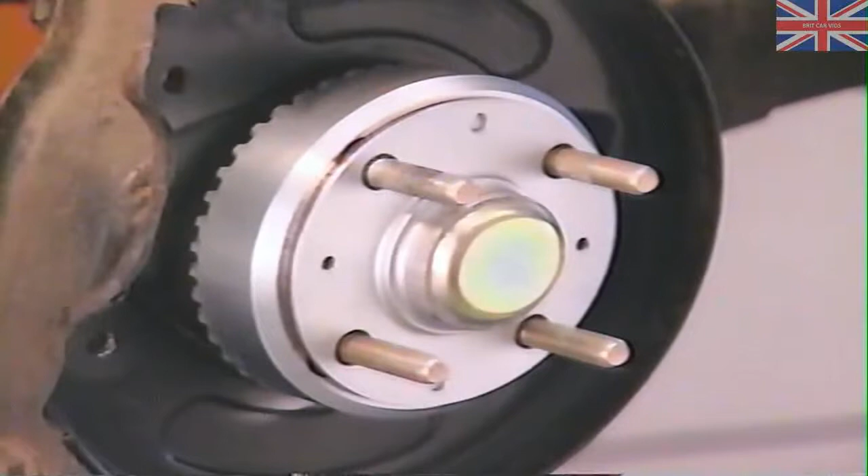As with the other MMC anti-lock systems that you've seen, this system has a wheel speed sensor at each wheel. The wheel speed sensors work along with a toothed tone wheel to send electrical pulses to the ABS controller. These signals tell the controller how fast the wheels are turning.

On the Colt and Summit, the ABS controller is located under the instrument panel behind the floor console. The ABS power relay, which supplies power to the ABS controller, is located behind the lower instrument panel to the left of the steering column.

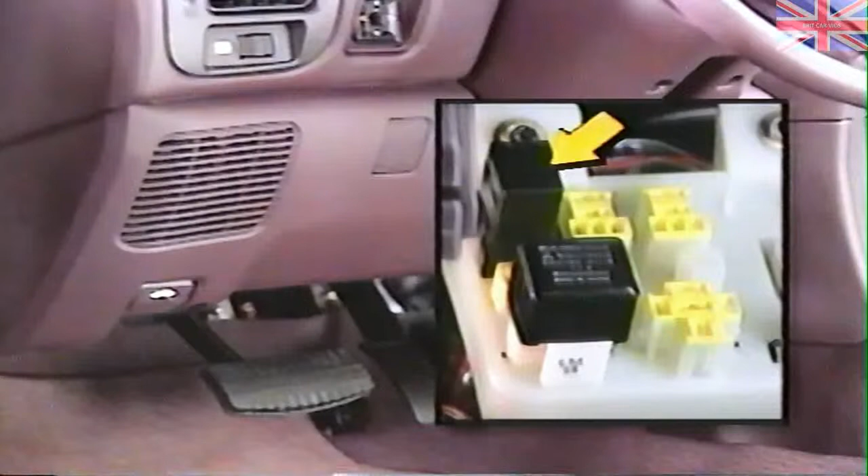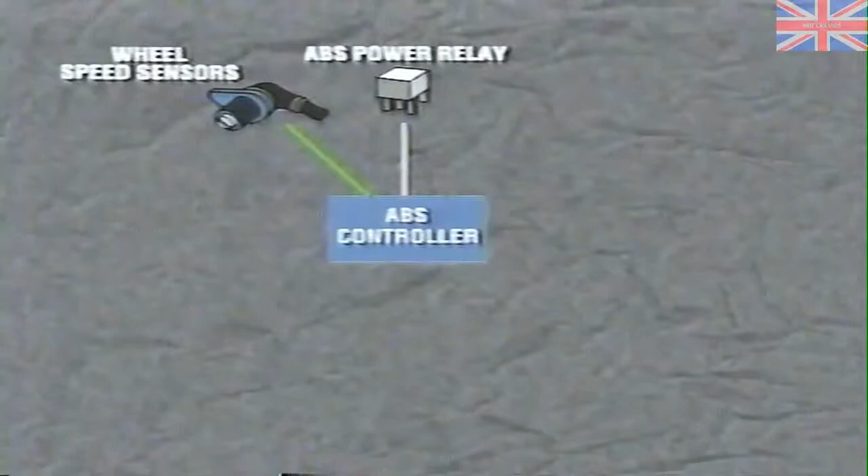Besides the input from the wheel speed sensors, the other informational inputs to the controller come from the stoplight switch and the generator L terminal. The stoplight switch above the brake pedal informs the controller when the brakes are applied. The generator L terminal signal comes from the generator. It lets the controller know when the engine is running.

The outputs from the controller are to the ABS warning light, the data link connector, the ABS valve relay, the solenoid valves in the hydraulic unit, and the ABS motor relay.

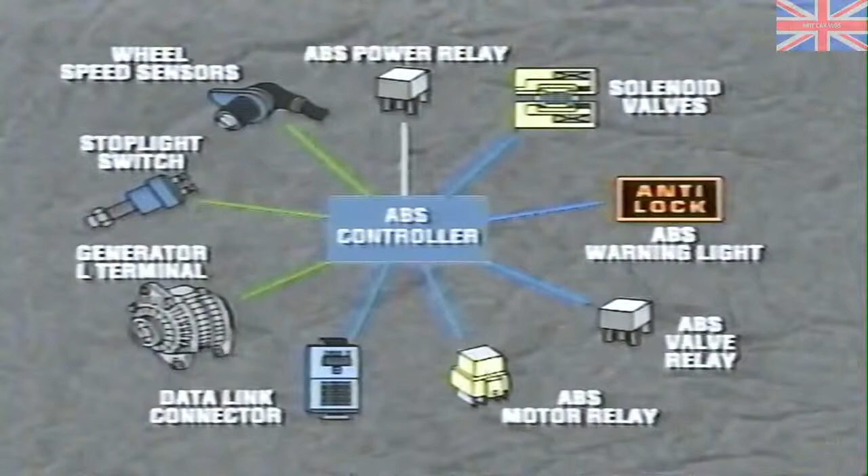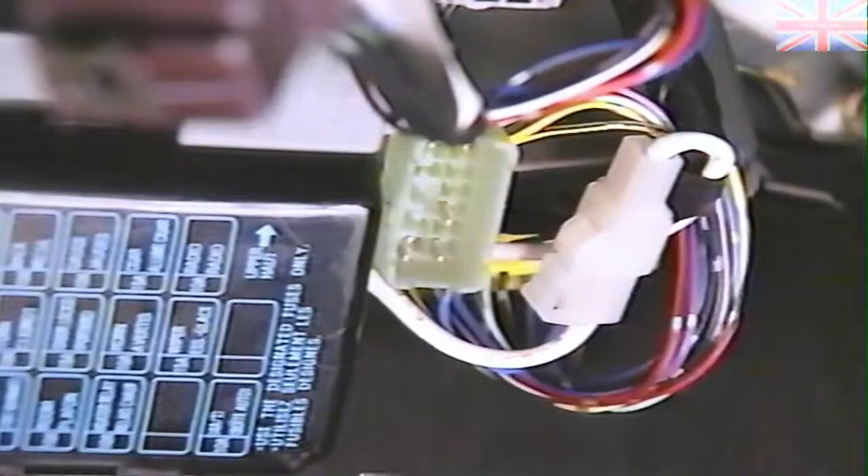As you no doubt know, the ABS warning light in the instrument cluster will be triggered by the controller if a problem develops with the anti-lock system. Of course, all diagnostic information contained in the ABS controller can be accessed through the data link connector.

The ABS valve relay, which supplies power to the solenoid valves, is located in the engine compartment near the hydraulic unit. The hydraulic unit is mounted on the left inner fender in the engine compartment. It contains a solenoid valve for each ABS channel. On the '93 Colt Summit, that means there are 4 valves.

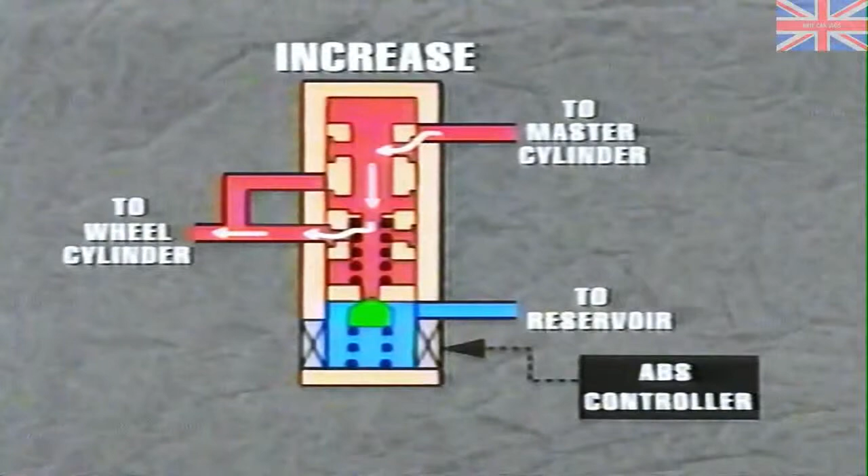The controller can signal a wheel's corresponding valve to either increase pressure or reduce pressure, based on how much brake hydraulic pressure is needed for each wheel to keep it from locking up. During the anti-lock braking process, more hydraulic pressure is required than can be supplied by the power brake booster.

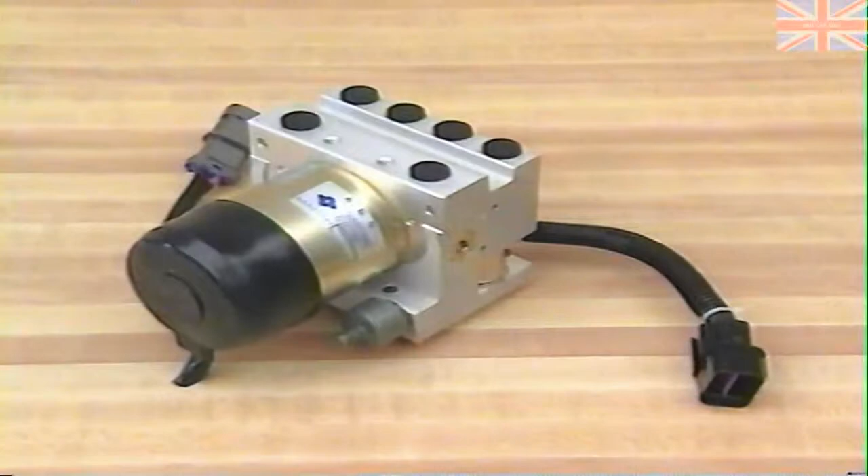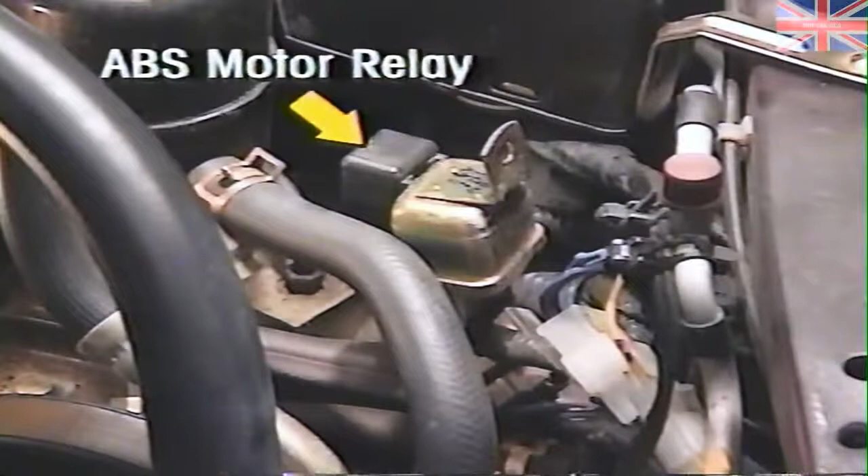To supply the necessary hydraulic pressure for the system, an electrically driven pump is used. The pump and the motor that drives it are both contained in the hydraulic unit. The pump motor assembly is activated by the controller through the ABS motor relay. This relay, like the ABS valve relay, is located near the hydraulic unit.

If there is an ABS failure, the ABS controller will interrupt power to the valve relay so that no power is going to the solenoid valves. This is called the fail-safe mode. In the fail-safe mode, ABS will not operate, but full foundation braking is available.

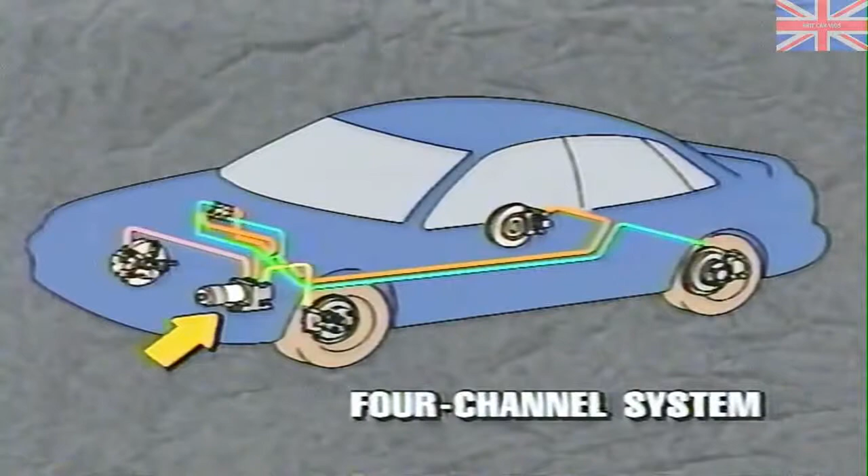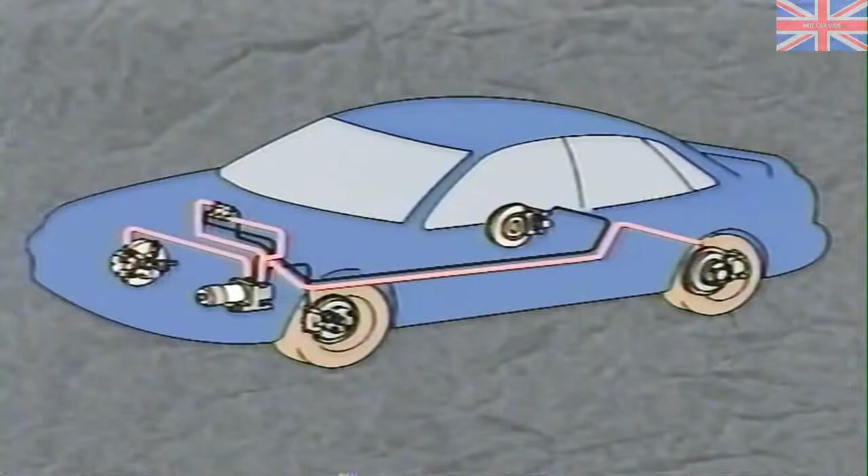Of the Colt Summit system's 4 channels, the front 2 wheels are completely independent circuits, but both rear wheel circuits are balanced by a select low valve in the hydraulic unit. This valve mechanically equalizes the brake pressure between the rear wheels so that during anti-lock operation, the lower of the pressures applied to the rear wheels is always selected for both wheels. This increases vehicle stability. The valve accomplishes this without fluid from the 2 circuits coming in contact with each other. This maintains the integrity of the dual diagonal brake circuits of the foundation brakes.

How does all this come together when it's needed? Let's look at an example. Say you're driving on your way home and another vehicle unexpectedly cuts in front of you. You brake quickly, activating the ABS. Unfortunately, your right rear wheel crosses through a small puddle of water. How does the Colt Summit system react?

Since the front wheels do most of the braking on any car, as you might expect from such intense braking, both wheels are displaying a locking tendency. The ABS controller determines this from the slowing wheel speed sensor signals. The controller then signals the valves for the front wheels to reduce pressure. As soon as the locking tendency is over, pressure is reapplied.

Naturally, since both front circuits are independent, these actions will not happen at exactly the same moment. In the meantime, the right rear wheel has little traction in the puddle. The controller notices the wheel speed signals slowing down to the point of locking, so it tells the appropriate valve to release brake pressure. At the same time, the left rear wheel is on dry pavement and displays no locking tendency, so its pressure should increase, but it won't.

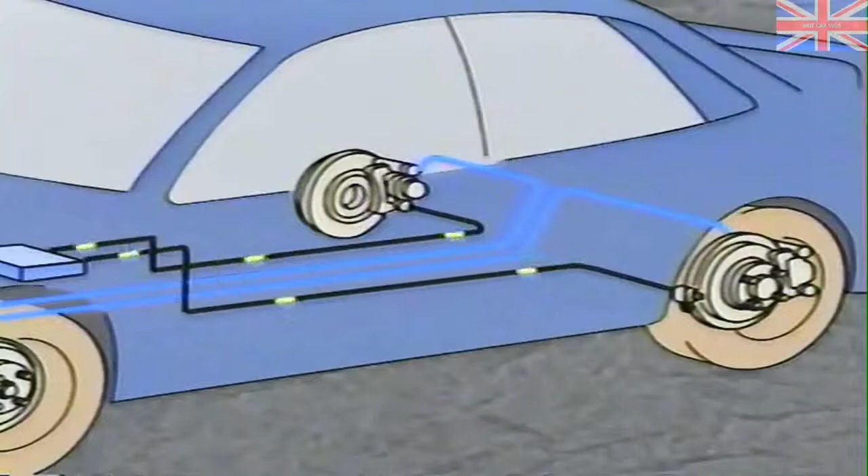Why? If you remember back to the system component descriptions, the select low valve equalizes the pressure to the lesser of the two pressures sent to the rear wheels. In this case, the pressure of the right rear wheel is the lesser pressure because it's on wet pavement. During all of this action, the pump motor assembly is pumping the brake fluid to maintain the hydraulic pressure of the system.

Of course, this is an oversimplification of the entire process. All this and much more happens in fractions of a second. And yet, despite the short distance, our car was able to stop in time. If the distance was shorter, then the anti-lock system would still have enabled the driver to brake and effectively steer around the obstruction. That's a basic overview of the '93 Colt Summit anti-lock brake system, and it's a good place to start because the other MMC anti-lock brake systems are similar to it.

Now, let's test your memory with a review question.

The anti-lock system on the '93 Colt and Summit has how many hydraulic brake channels? The answer is the system has 4 separate hydraulic channels.

The remaining MMC anti-lock brake systems are not only similar to the '93 Colt Summit system, but some are nearly identical to each other. For instance, the anti-lock brake system used on the front-wheel drive Laser Talon, Colt Vista, Summit Wagon, and Stealth models are in reality one system. This system, unlike the '93 Colt Summit 4-channel system, has 3 channels. The rear wheels on this system are controlled by the same solenoid valve in the hydraulic unit.

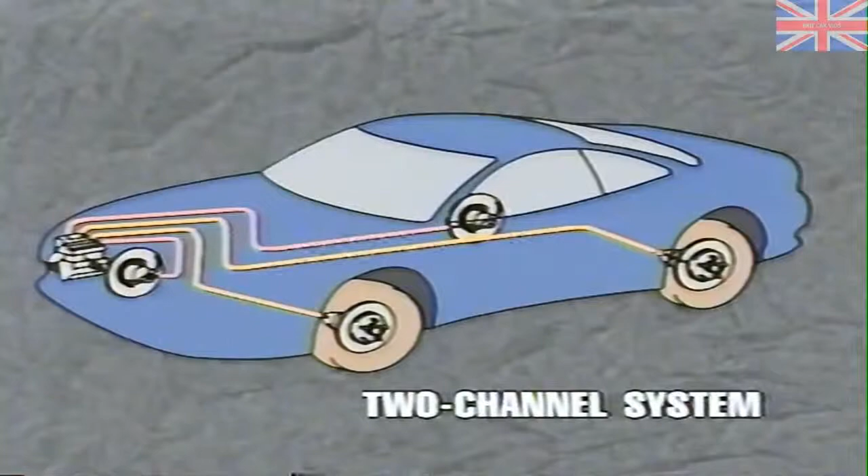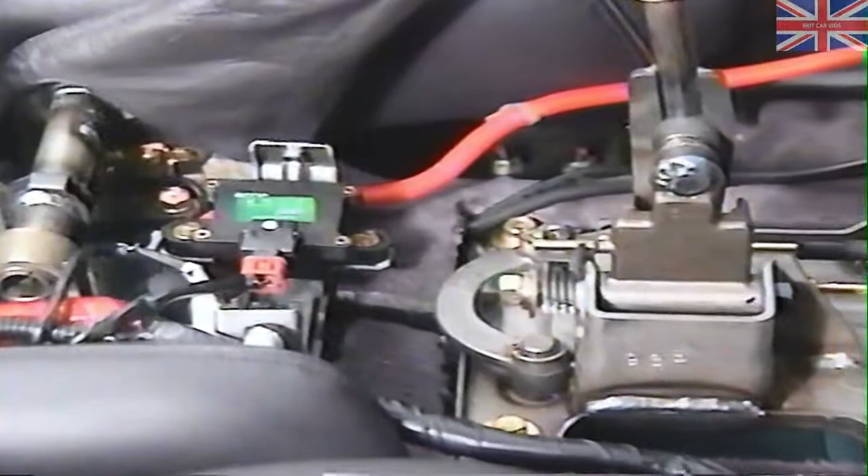Another unique feature of this all-wheel drive system is its use of a G sensor. Since ABS won't activate with the vehicle standing still, the G sensor lets the controller know that the vehicle is still moving, so it can apply the brakes accordingly. The G-sensor is needed on all-wheel drive models since all four wheels are connected by a drive line. And on ice or other slippery surfaces, the wheels can decelerate at very nearly the same rate to the point where they are not turning, causing the ABS controller to think the vehicle has stopped.

Despite the differences these two systems have with the Colt Summit system, the components are quite similar. Their locations do vary from car to car, though. Review the February '92 Mastertech or the December '91 Videotech releases for specific ABS component locations on all but the '93 Colt Summit models. You can see that despite some differences in these systems, the basic operation is very similar.

After this review question, we'll take a look at how this ABS operation can be misunderstood by customers.

The anti-lock brake system on MMC all-wheel drive models has how many hydraulic channels? The answer is 2 channels. Every MMC all-wheel drive model with ABS has a 2-channel system.

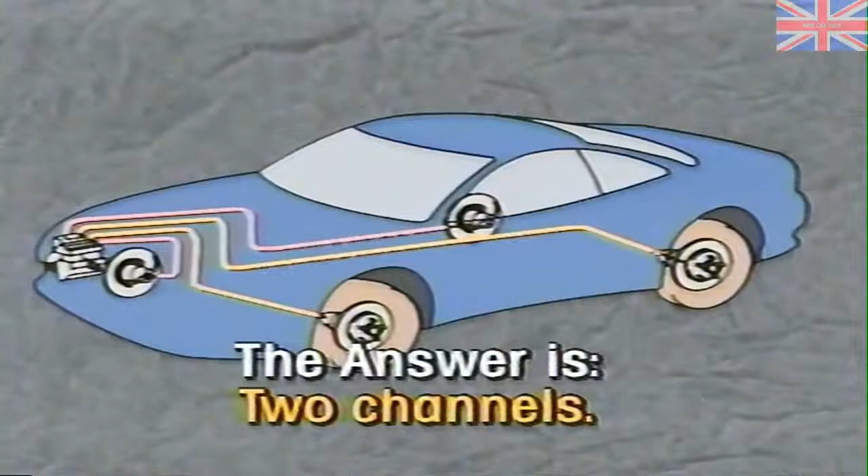With the quick growth in vehicles equipped with anti-lock brakes, many customers will be driving ABS-equipped cars for their first time. While you may know much about how anti-lock systems operate, the new customer may have no idea what to expect. The fact is, many new car customers don't thoroughly read their owner's manual, so it should come as no surprise that they come to the service department complaining of strange vibrations and noises.

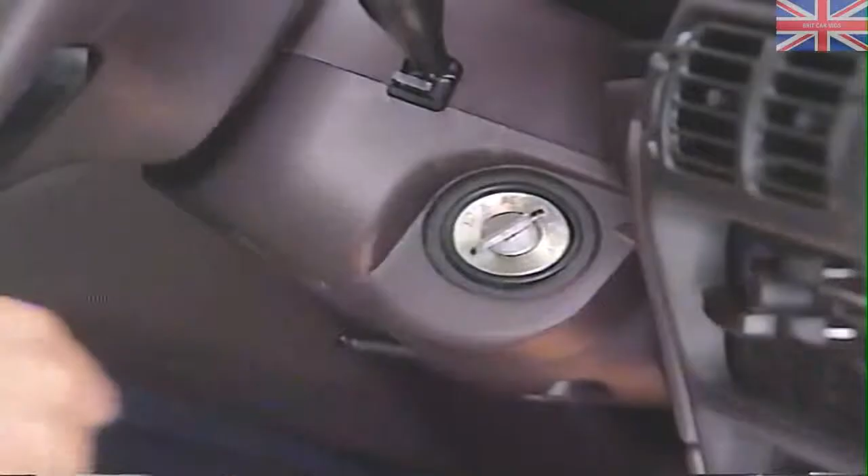In such cases, the patience of technicians and service advisors can go a long way to putting customers' minds at ease. Let's review some of the operating characteristics of the MMC anti-lock braking systems. First, the ABS warning light will stay on for about a second after starting the vehicle. If the light stays on after this, then there is a problem with the system, and ABS is not available.

In such a case, stress to your customers that at this point, the car is as safe as any non-ABS vehicle, since full foundation brakes are still available. However, if the foundation brake light comes on, advise them not to drive the vehicle. If the ABS warning light comes on while driving, inform the customer to pull over and turn off the engine as soon as it is convenient to do so.

They should then restart the car and drive at speeds of 6 miles per hour or higher for at least 20 seconds. If the light goes out, the system is fine. Driving at this speed allows the ABS to go through its self-check procedure that occurs after startup. If the ABS warning light stays on, the customer should be advised to bring the car in for service.

The one operating characteristic of the anti-lock system that causes the most concern among owners not used to ABS-equipped cars is the self-check procedure we just referred to. On MMC anti-lock systems, the check is actually performed at about 4 miles per hour. The ABS controller operates the components of the system to check if they are working properly. A whining noise and vibration may be noticed when the pump motor and solenoid valves are activated. Assure customers that this is entirely normal.

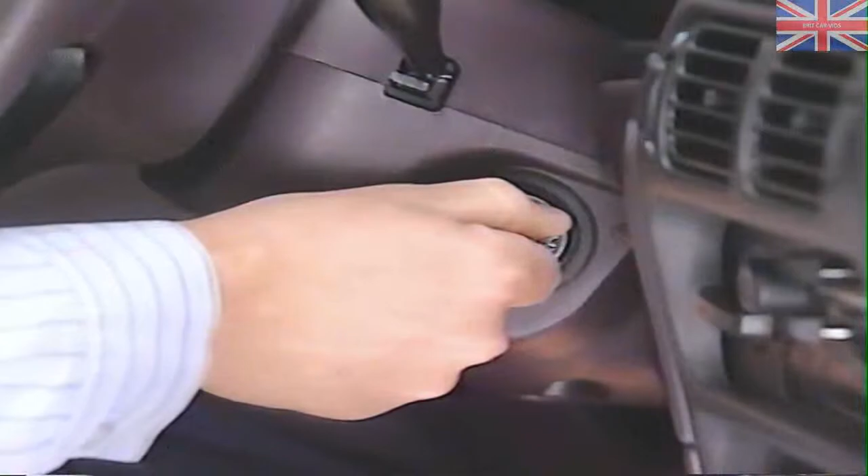Once the car is started, the ABS warning light will come on as long as the fusible link is disconnected. The fusible link can be reinstalled once the battery has sufficiently charged. With the fusible link installed, start the car again to check that the ABS warning light goes out. This procedure is similar for all ABS-equipped MMC vehicles, the only difference being which component is disconnected. The February '92 Mastertech and the December '91 Videotech discuss the procedure for all MMC models except the Colt Summit we just covered.

If customers noticed the vibration and noise during the ABS self-check, then they may very well notice it during an ABS stop. Some vibration will be felt in the car body, steering wheel, and brake pedal. In addition, the pedal will drop somewhat and then feel hard, as an increasing amount of brake fluid is drawn from the reservoir. Some customers may be unaware of when ABS is supposed to operate. They may mistake ABS operation for a problem in the brake system.

For instance, during normal braking on a rough road, the driver may notice the pedal drop and then turn hard. The vehicle also comes to a stop much quicker than the driver anticipated. Since this isn't a panic stop, the customer is unaware that the ABS was activated. In such cases, remind the customer that this just shows the ABS is working properly.

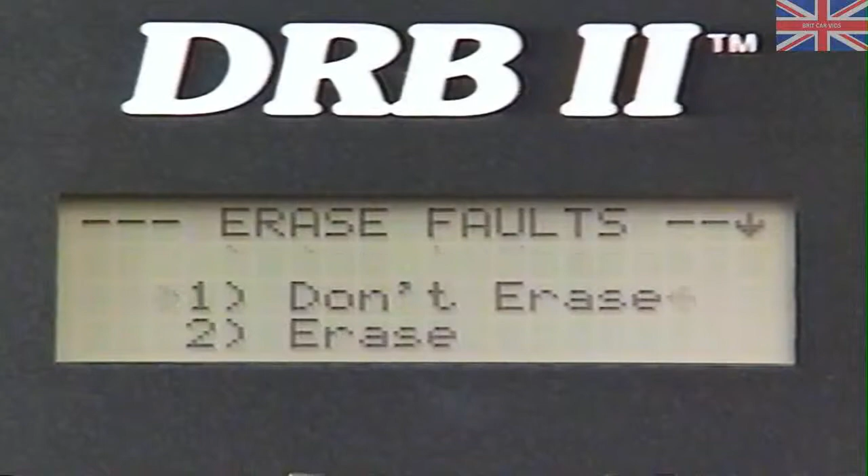Another important item to remember is to clear all trouble codes from the controller's memory. If this is not done, the ABS warning light will stay on, giving the impression of a failed ABS controller. Always check that the codes are cleared before you assume the controller is faulty. If the codes can be erased, it means the problem was temporary, perhaps intermittent, or happens only when driving.

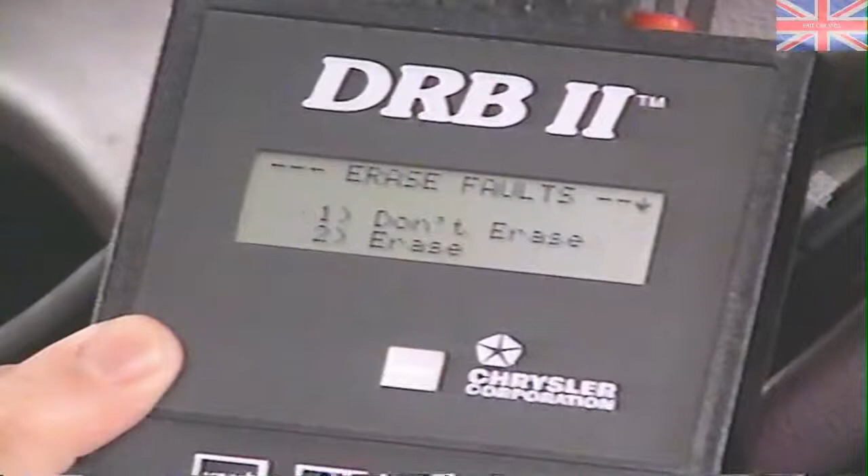If it is not possible to clear the trouble code from the controller's memory, then that means the trouble is currently being detected by the controller. For instance, trouble codes cannot be cleared when the ABS is in the fail-safe mode. Remember that this is when the system is not operating properly and is then shut down by the controller. If you cannot clear the codes, the trouble will have to be repaired following the steps in the anti-lock braking system troubleshooting section of the service manual.

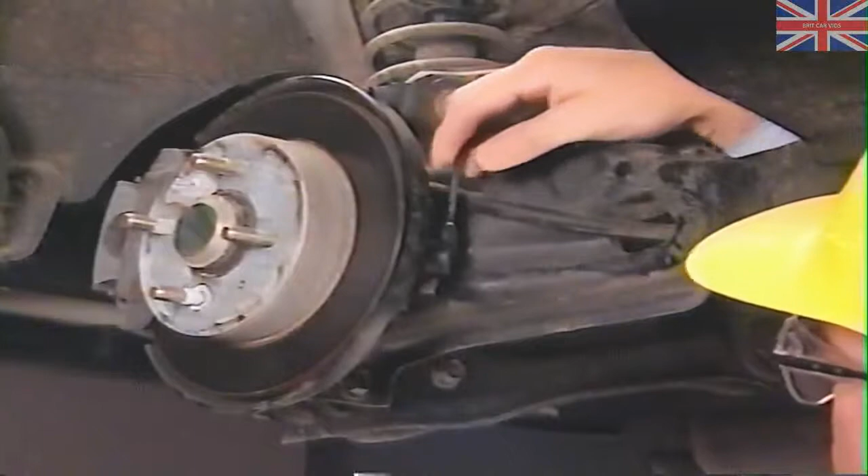If you can clear the code and you believe the problem to be intermittent, try to duplicate the cause. Usually, intermittent problems are caused by vibration, heat, or excess electrical resistance. Wheel speed sensors are especially vulnerable to vibration from the movement of suspension components. To duplicate a vibration, gently shake or rock the suspect component and see if a trouble code is registered. To test for a malfunction due to heat, use a hairdryer to heat the component. Be careful not to heat the part above 176 degrees or it could be damaged.

If electrical interference is suspected, turn on all electrical switches and see if the problem reoccurs. Additionally, check that electromagnetic or radio frequency interference from cellular phones or two-way radios is not interfering with the ABS. The customer should also be questioned if the interference happens in one location. This could be caused by such things as TV stations or radar from airports. Of course, intermittent problems can be caused by a bad connection. Inspect electrical connectors and terminals to ensure that the terminals are clean and their connections are complete.

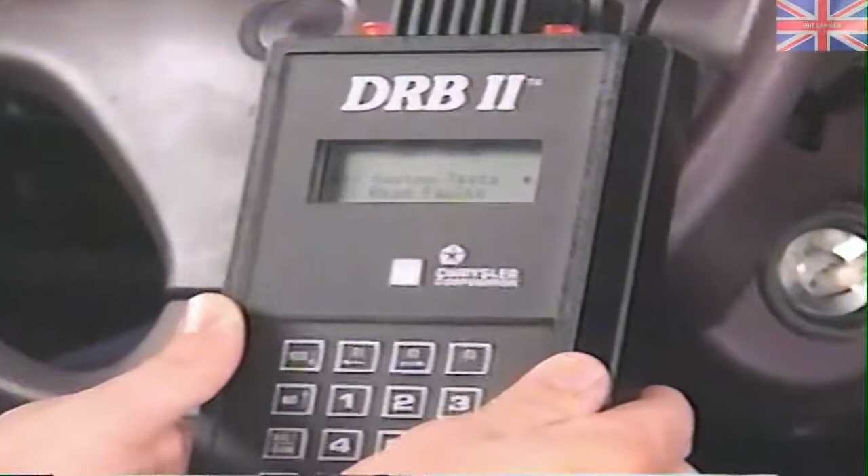Another important diagnostic point deals with the scan tool. If you have used the scan tool on these MMC vehicles, then you will have noticed that the time before readouts appear on the screen can be longer than with the domestic systems. This is normal and does not indicate problems in the system. The MMC system simply has a slower baud rate, which is the unit used to measure the quickness of communication.

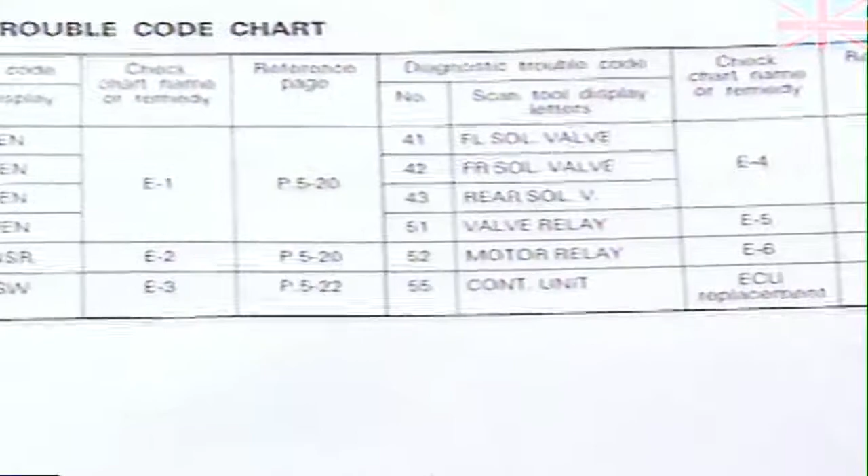As for the readouts themselves, they are identical on all Stealth, Laser, Talon, and Colt Vista, Summit wagon models. There are 12 trouble codes on these models. On the new Colt, Summit models, however, there are 27 codes, many of them with different numbers than on the other cars. Keep this in mind in case you have the codes for the other cars memorized.

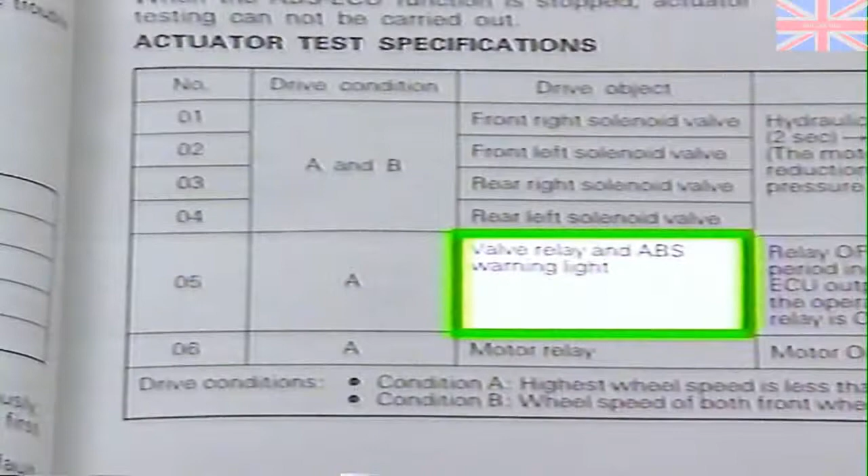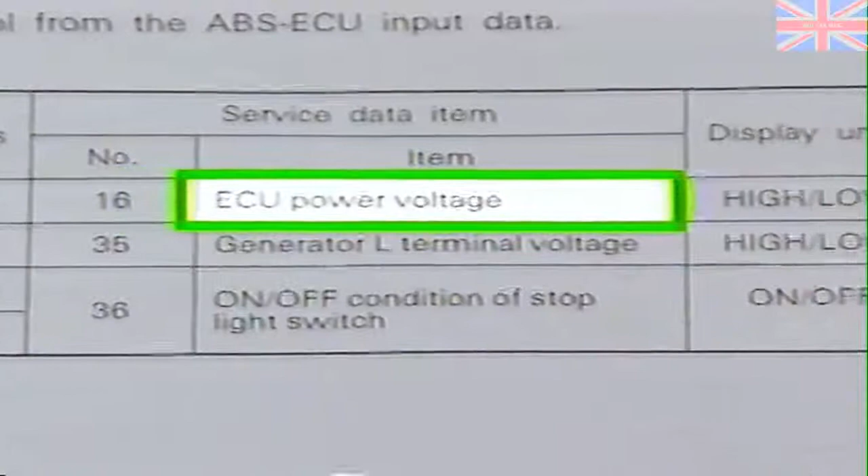There are also differences in the actuator tests that can be performed with the scan tool. In addition to the solenoid valve tests on previous models, the newer Colt, Summit system has tests for the valve relay and ABS warning light, as well as the test for the motor relay. The Colt, Summit system also allows you to check wheel speed sensor signals, ABS controller voltage, the generator L terminal voltage, and the on-off status of the stoplight switch. The systems on the other MMC vehicles do not have this ability.

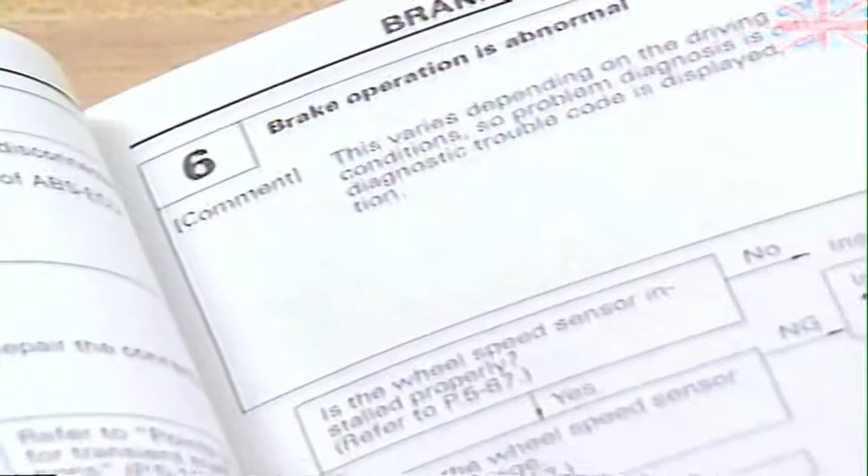Regardless of which system you have to diagnose, using the scan tool and the diagnostic flowcharts in the service manual will help you quickly find the cause of any ABS problem. After the review question, we'll use the diagnostic flowcharts to solve a sample problem.

If you disconnect the scan tool before turning off the ignition, what kind of trouble code will be triggered? The answer is a trouble code for a failed ABS controller will be triggered. Always turn off the ignition before connecting or disconnecting the scan tool.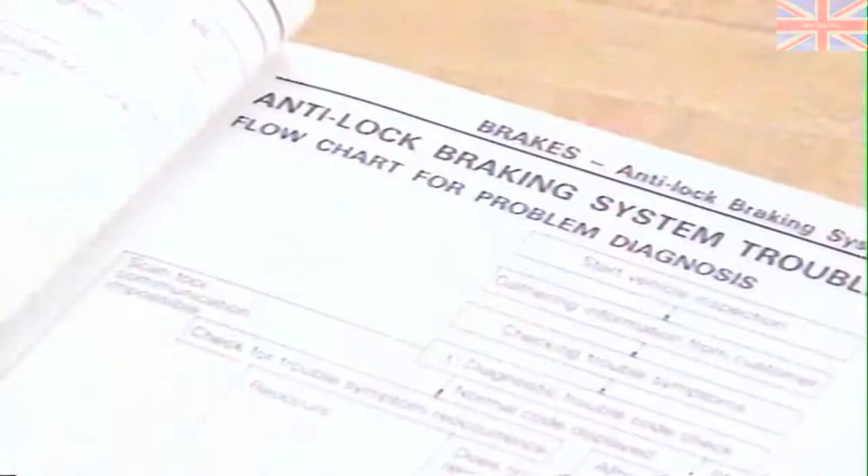A customer brings in a '93 Summit with an ABS warning light that stays on after the vehicle is started. The customer tells the service writer that the problem developed shortly after the vehicle became severely stuck on a muddy, rough road. When the job gets to the technician, he looks up the general ABS troubleshooting flowchart, since an illuminated ABS warning light could signify just about any ABS component.

The first step in the procedure is to gather information from the customer. This has already been done, so the technician moves on to the next step, which is to check trouble symptoms. The ABS warning light stays on after the car is started, just like the customer said. The next step in the flowchart is to check for trouble codes with the scan tool. Remember that the scan tool should be hooked up with the ignition off.

The technician finds the trouble code 23 for the right rear wheel speed sensor was in the controller's memory. At this point, you should write down the information so that the trouble code can be cleared. Now that the technician has a trouble code, he can refer to the more specific trouble code flowcharts.

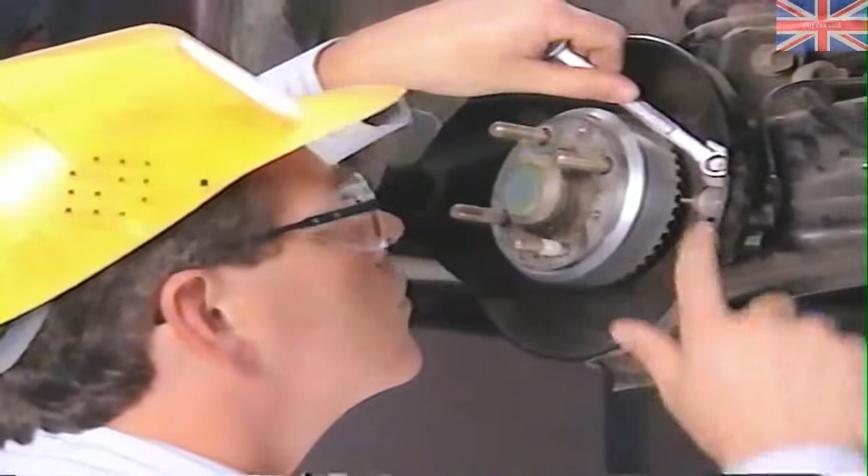The comment at the top of the flowchart says that this code is displayed when wheel speed reaches at least 6 miles per hour, but no wheel speed pulses are input, and yet the controller can't verify that the circuit is open. The first step of this chart refers the technician to the procedure for the proper installation of the wheel speed sensor. Everything looks correctly installed, but this procedure also requires checking the air gap between the sensor and the tone wheel. To check the gap, a blade-type brass feeler gauge is recommended, since it will not be affected by the magnet in the sensor's pole piece.

The service manual states that the gap should be between 12 thousandths and 35 thousandths of an inch. This gap appears to be a very small amount over 35 thousandths of an inch. Since the gap is so close to being out of range, this could account for the trouble code. Perhaps the gap got knocked out of adjustment when the car got stuck.

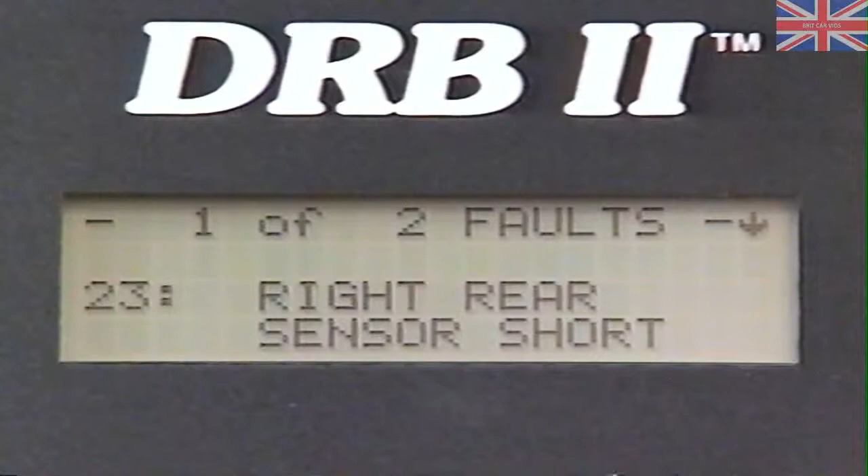The technician readjusts the air gap to well within the specifications and takes the car on a road test to see if the trouble code and the warning light reappear. Unfortunately, both do. Apparently, the air gap was not the problem. After again clearing the trouble code, the technician goes back to the flowchart.

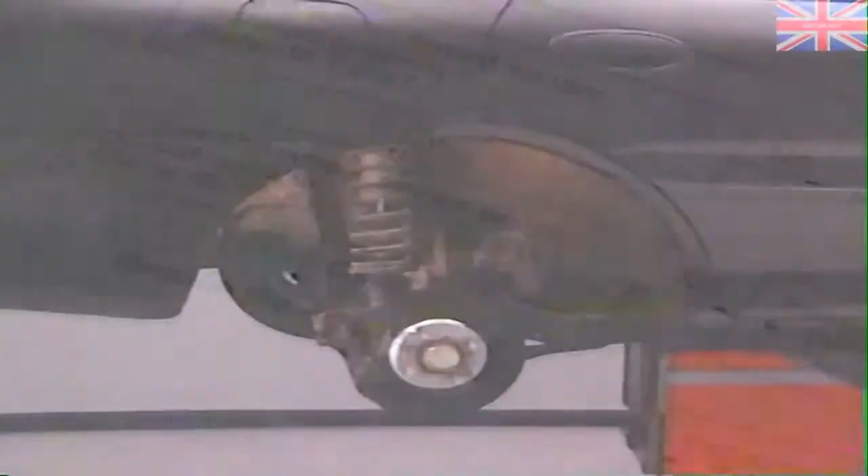The next step is to check the wheel speed sensor output voltage. This must be done with the vehicle on the hoist, the wheel off, and the parking brake released. The right rear wheel speed sensor connection to the controller has to be probed at terminals 37 and 45 by either an oscilloscope or a digital volt-ohm meter. Make sure that when you probe this or any connector, you do it from the harness side. Probing the terminals can spread the terminals out, resulting in a bad connection.

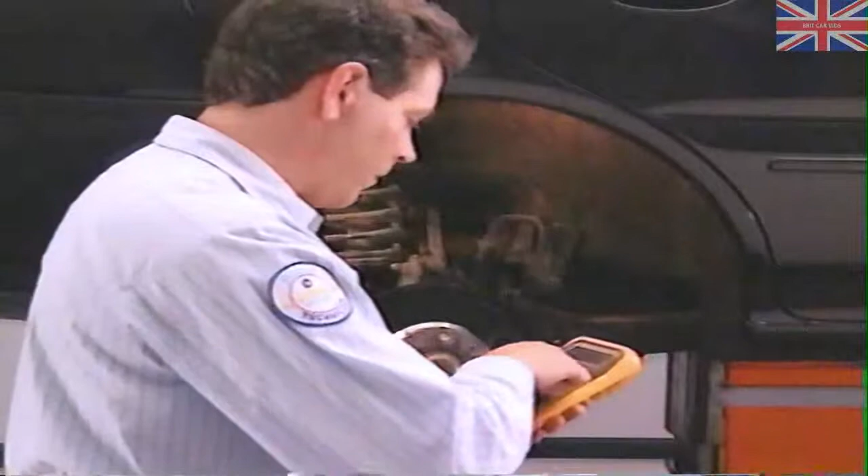With the volt-ohm meter hooked up and in view, turn the wheel at approximately 1/2 to 1 full rotation every second. Check the voltage while doing this. Here, we're supposed to get an output of at least 70 millivolts, but we're getting much less. It looks as though the sensor is faulty. To make sure, the flowchart refers us to a test for wheel speed sensor continuity.

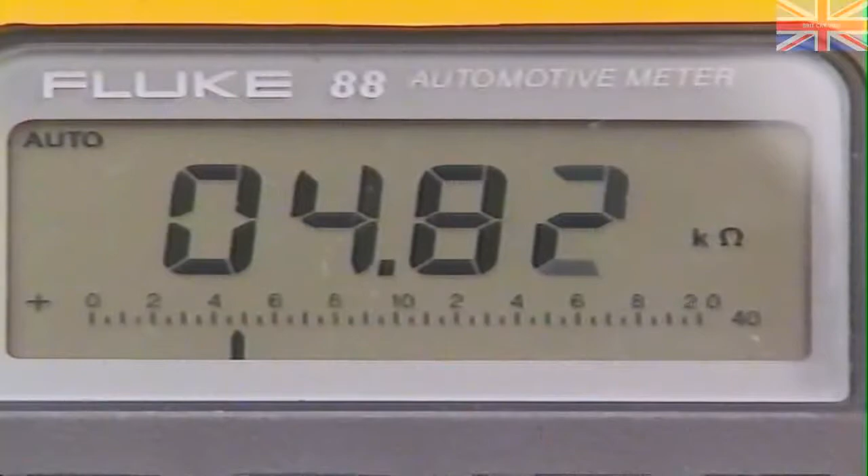After removing the sensor, the resistance is measured across the terminals. We get a resistance reading that is much higher than the 1.4 to 2.2 kiloohms listed in the service manual. It's obvious that a new wheel speed sensor is in order. Perhaps the old one got damaged when the car was severely stuck on that rough road.

After the new sensor is installed and the air gap checked, the technician takes the car for another ride. The ABS warning light is no longer on, and a check with the scan tool reveals that no trouble code has been registered. Not every diagnosis and repair goes this easily, but following the proper procedures in the manual will help you find the answer to your diagnostic problems in the minimum amount of time.

Now, let's see how much time it takes you to solve this problem. When probing an electrical connector, should the probe be inserted in the front or in the harness side?

The answer is that, when possible, you should always back probe a connector to prevent spreading out the terminals, which could lead to poor contact.

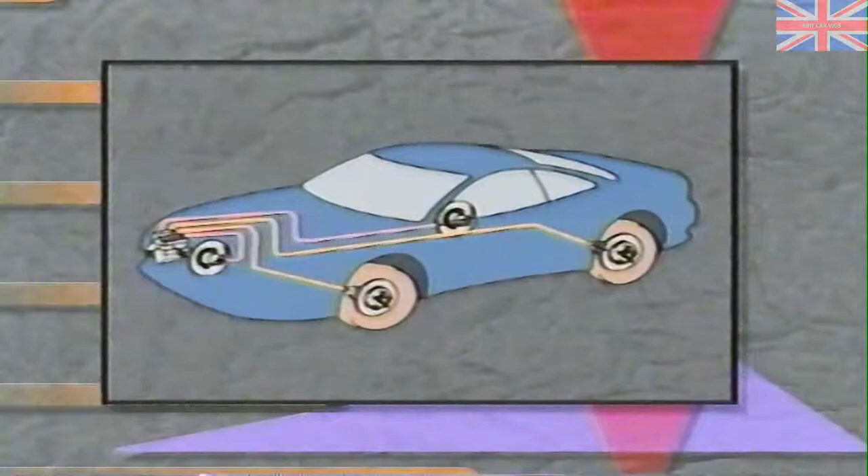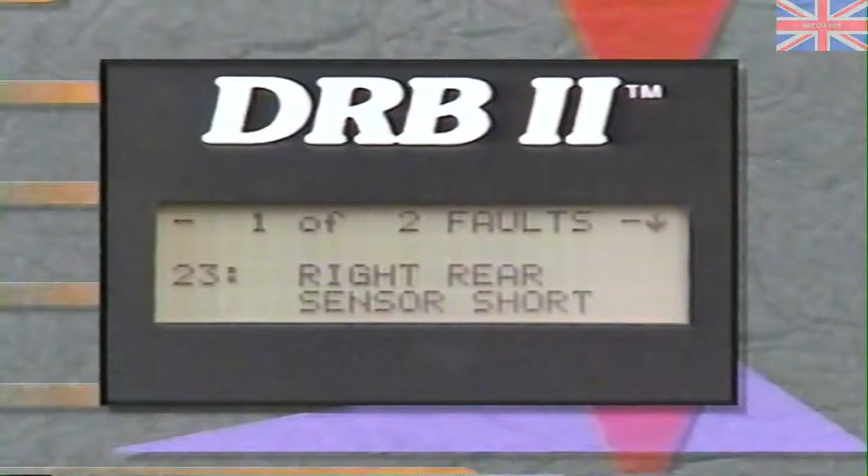Well, that's it for this month. We've looked at the 4-channel system on the '93 Colt and Summit and compared it to the other MMC Antilock systems. We've also reviewed the operating characteristics of the MMC systems, as well as informing you about their diagnostics and using this information to tackle a sample problem. Between this program and the previous Antilock releases, you should have a very comprehensive understanding of how these MMC Antilock braking systems work. We hope it'll make your job a little easier. Until next month, goodbye.

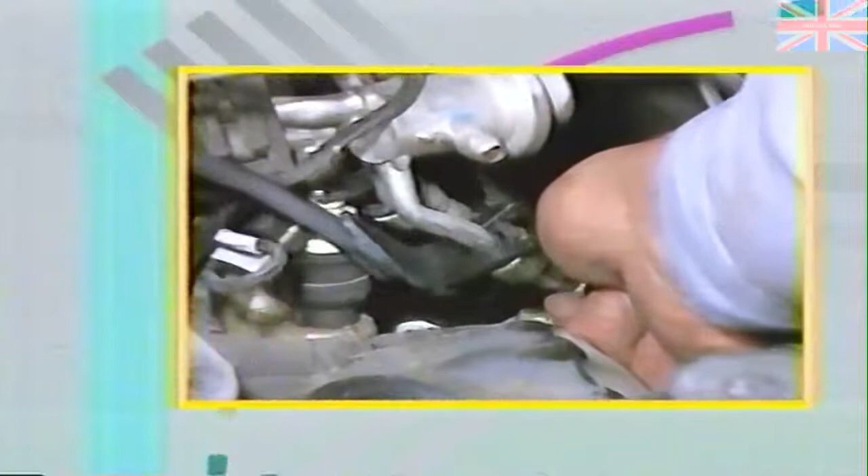As part of a continuing program to supplement your training, this videotape was developed by Chrysler's Service Training Group to provide an overview of the different types of fuel tubes, hoses, clamps, and quick connect fittings you will encounter during the service of fuel systems on both passenger cars and trucks.

It's important to note that the procedures illustrated in this program apply to fuel system components and fittings for gasoline-powered vehicles only. The procedures do not apply to diesel and alternate fuel vehicles. Also, the procedures illustrated do not apply to air conditioning lines, transmission cooling lines, and other hydraulic lines, even though some of the fittings and lines in these systems may be similar in appearance. Always refer to the appropriate service manual procedures for repair and service of these systems.

This program was designed with 2 main objectives in mind. 1, to familiarize you with the proper service procedures you must be aware of when working on any fuel system component. 2, to review the different types of quick connect fittings currently in use on both passenger cars and trucks.

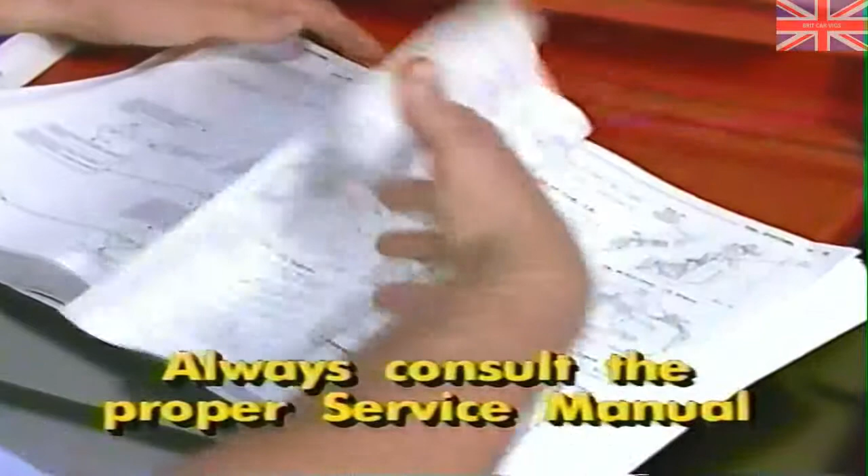Before beginning service on any fuel system related problem, always consult the proper service manual to familiarize yourself with the system being serviced. Also, observe all of the safety precautions and warnings in the manuals related to the procedures being performed. If diagnostic system tests are required, follow the manual procedures exactly as they are written to ensure an accurate and safe test procedure.

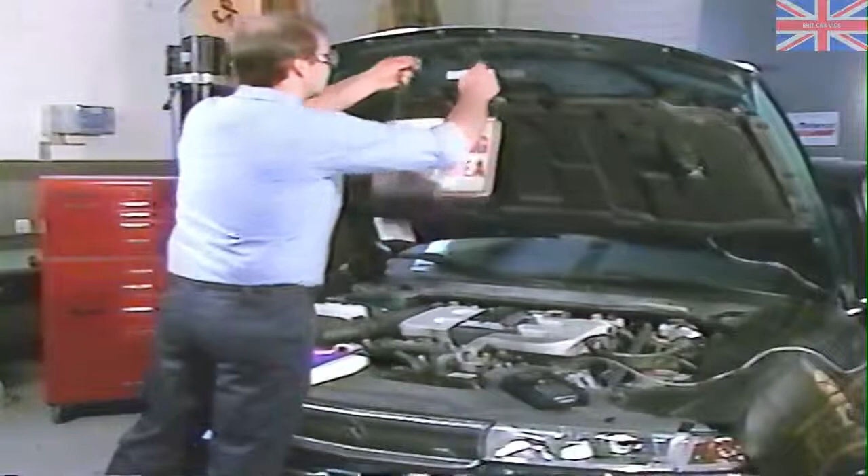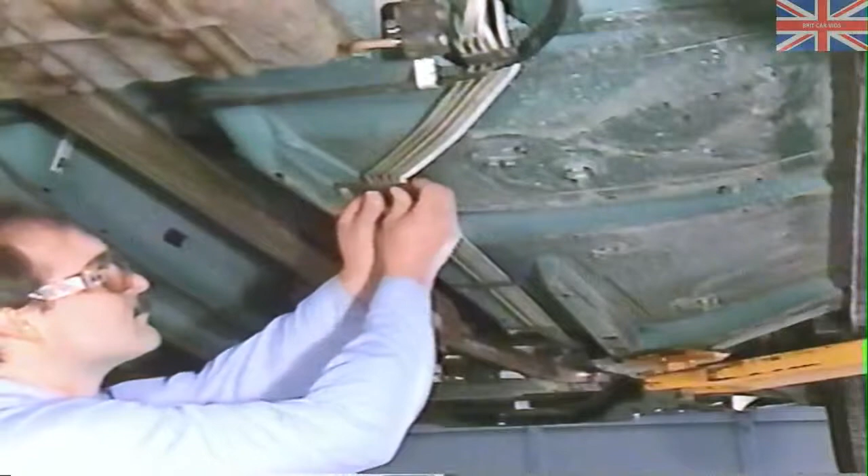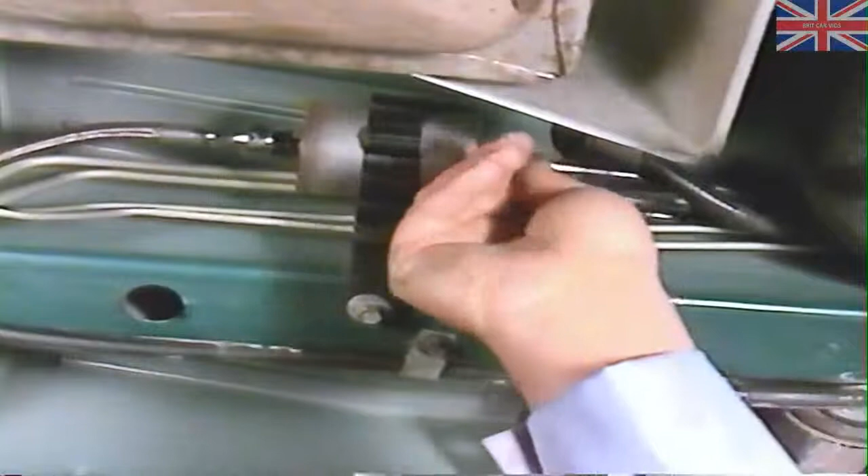While working on a fuel system condition, proper safety precautions should be followed, such as posting no smoking and/or fuel system warning signs around your work area to warn others. Careful, thorough service of fuel systems is critical for proper vehicle operation and customer satisfaction. To ensure service quality, it's a good practice to carefully inspect all fuel system components, lines, and connections while the vehicle is being serviced. During the inspection process, you should check all fittings, couplings, and clamps for fuel leaks, and check all hoses and fuel tubes for signs of wear or damage.

It's important to remember that the fuel system is under pressure, even with the engine off. Before servicing any fuel system hoses, fittings, or tubes, the fuel system pressure must be released. To do this, first disconnect the negative cable from the battery. Next, remove the fuel filler cap.

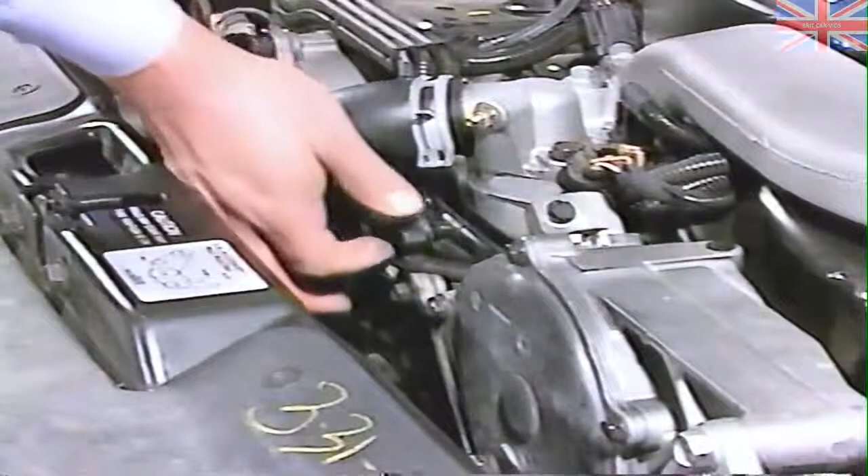If the vehicle is equipped with a fuel pressure test port on the fuel rail, remove the protective cap from the port. Check the service manual for the proper tool number for the fuel pressure test hose for the vehicle being serviced. Place the open end of the test hose into an approved gasoline container. Next, connect the other end of the test hose to the fuel pressure test port on the fuel rail. After connecting the hose, fuel pressure will bleed off through the hose into the container.

This procedure may vary slightly from one model to another. Always check the appropriate service manual before performing the fuel system pressure release procedure. You should also be aware that vehicles with 2.2-liter, 2.5 TBI, and 3-liter MPI engines do not have a fuel pressure test port. Always follow the procedures in the appropriate service manuals when performing a fuel system pressure release procedure on these vehicles. The next part of this program will cover fuel tubes, hoses, and clamps.

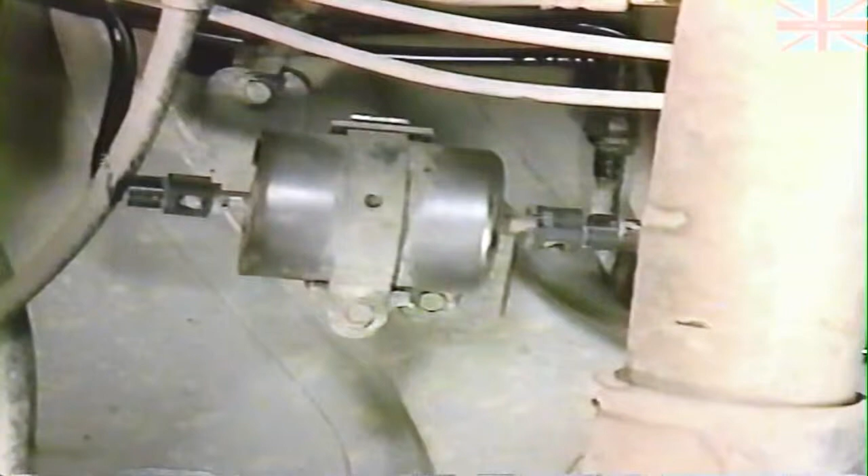During fuel system service, you will encounter a variety of fuel tubes and hoses. These hoses, tubes, and their clamps, couplings, and fittings should be replaced immediately if there are any signs of leaks or any evidence of degradation. You should never attempt to repair a fuel tube, and never try to interchange one style of tube or hose with another.

If replacement is required, refer to the applicable parts catalog for proper part numbers, and always use original equipment parts.

Before disconnecting any fuel tube or fitting, thoroughly clean the fittings to prevent fuel system contamination during removal. After disconnect or removal of fuel tubes and components, always cap or cover the ends of fuel tubes and the open ports on fuel system components to protect against fuel system contamination.

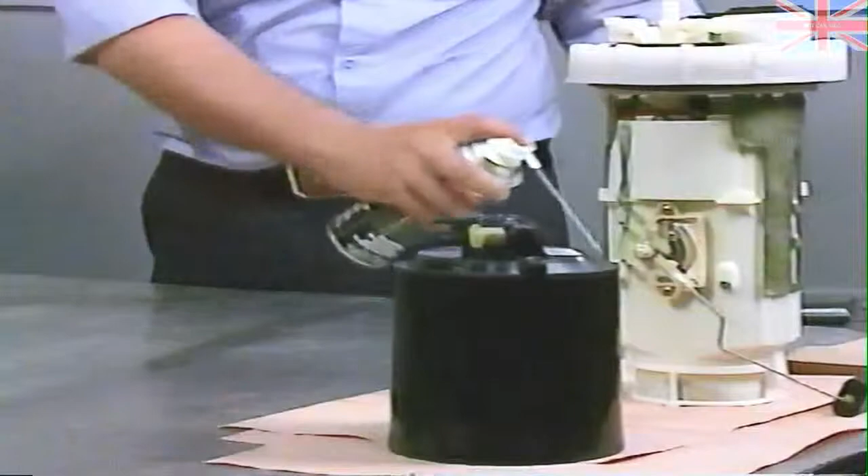When storing or working on system components, always ensure that the work area is clean and free of possible contaminants. When servicing fuel system tubes and components, handle the components with care during removal and installation to avoid any damage.

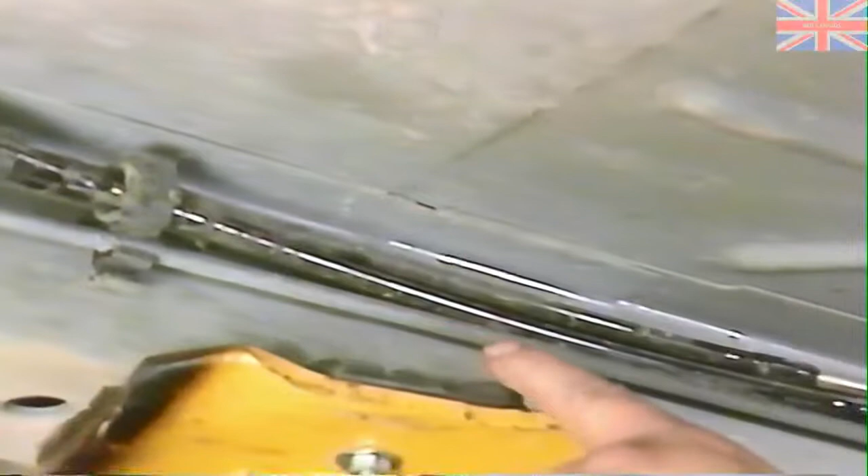During installation, avoid contact of any fuel tubes and hoses with other vehicle components that could cause abrasions or scuffing. Also, be sure that tubes and hoses are properly routed to prevent pinching or contact with heat sources. Ensure that the tubes are properly secured in their original routing clamps or brackets.

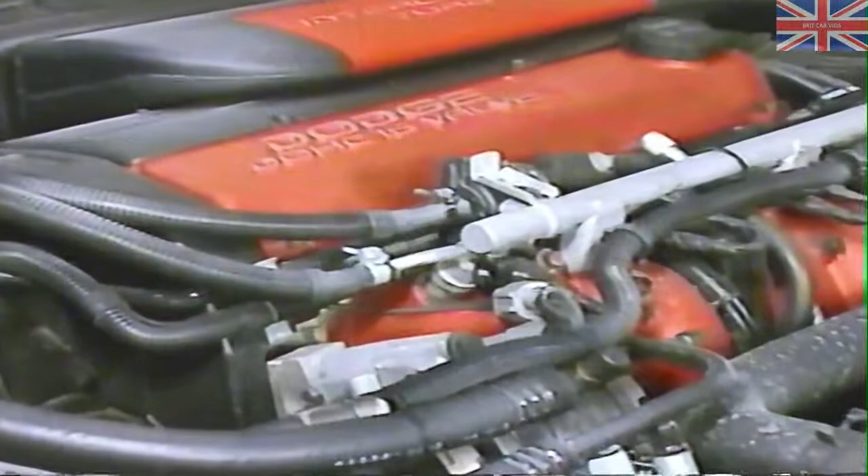The tubes and hoses used on fuel-injected vehicles are of a special construction. This is due to the higher fuel pressure. If it's necessary to replace the components, use only original equipment replacement parts. When replacing fuel system clamps, use the proper size original equipment clamps only and refer to the applicable service manual for the proper procedures for installation of these clamps.

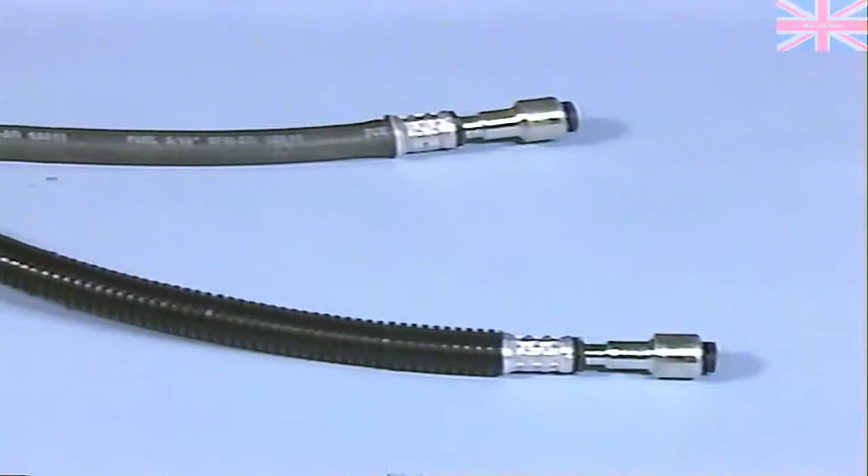In some applications, hoses are of a two-piece construction. These hoses will normally have a crimped end fitting. Never attempt to repair a hose with this type of fitting. Some fuel system hoses may have a rigid inner core. Be careful not to bend these hoses, as the rigid inner core could be pinched and restrict fuel flow. Also, never replace this type of hose with a standard rubber hose and hose clamp.

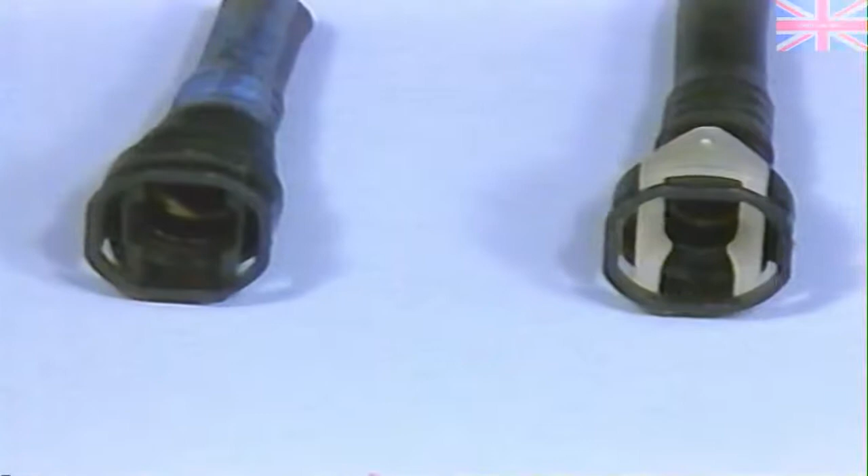The next part of this program will cover quick connect fittings found on fuel system components. A wide variety of configurations and sizes of quick connect fittings can be found on both truck and passenger car fuel systems. These fittings can be of either a plastic or metal composition depending on the application for the fitting.

These quick connect fittings consist of the O-rings, retainer, casing, and release mechanism. When the fuel tube enters the fitting, the retainer locks the shoulder of the nipple in place and the O-rings seal the tube. There are some important points to remember when working on quick connect fittings.

1. Quick connect fittings are not serviced separately. Never attempt to repair damaged quick connect fittings or fuel tubes. Replace the complete fuel tube quick connect fitting assembly if it's damaged.

2. Never attempt to mismatch quick connect fittings. Mismatched fittings, even of the same size, may appear to connect, but a proper seal may not be obtained.

3. Replace quick connect fittings and fuel tube assemblies with original equipment parts that match the size, design, and configuration that were removed. 4. Before disconnecting fuel tubes, mark or tag the tubes to ensure proper routing and later reassembly.

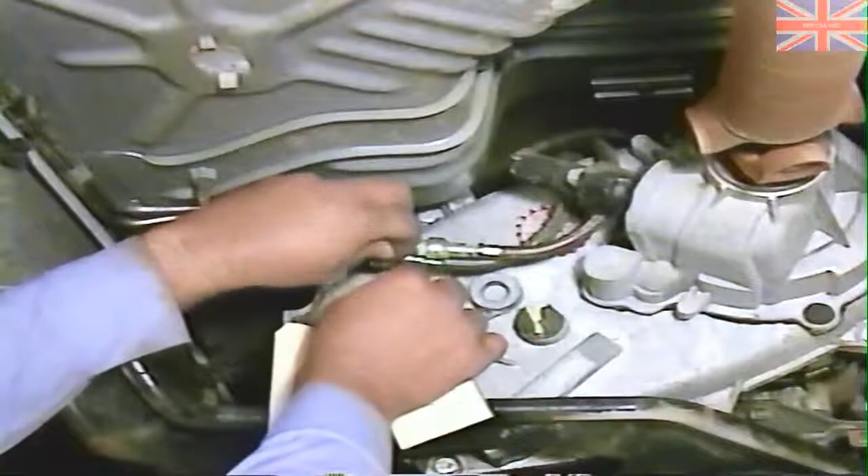Marking tubes is particularly important when disconnecting multiple tubes in the same area or when working on vehicles with a fuel return system, to ensure that fuel feed and return lines are not reversed during assembly.

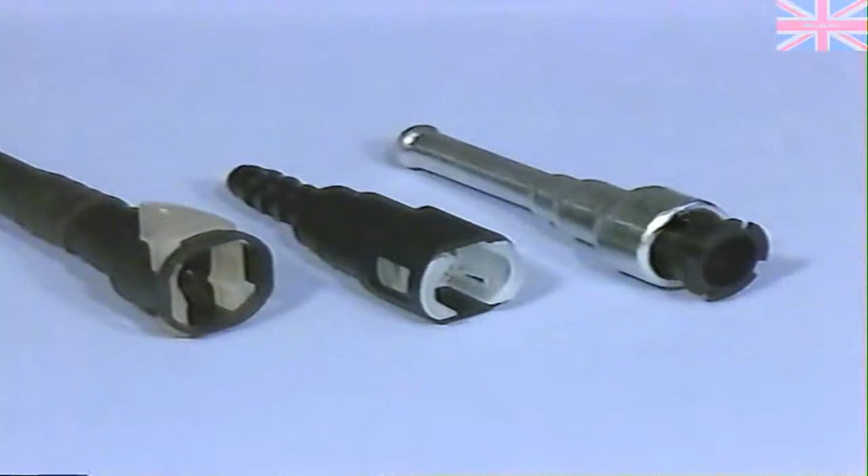Even though there are a wide variety of sizes and configurations of quick connect fittings, there are 3 basic styles of quick connect release mechanisms that you should be aware of. These are the release ring fitting, the 2-tab fitting, and the single pull tab fitting. Depending on the application, you may find one or more of these 3 styles on any model car or truck.

It's important to follow the proper procedures for disconnecting and connecting each of the 3 styles to avoid damage to the connector and to ensure proper sealing.

Again, before disconnecting any quick connect fitting, perform the fuel pressure release procedure demonstrated earlier. After releasing the fuel pressure, clean the fitting before disassembly to prevent contaminants from entering the fuel tube.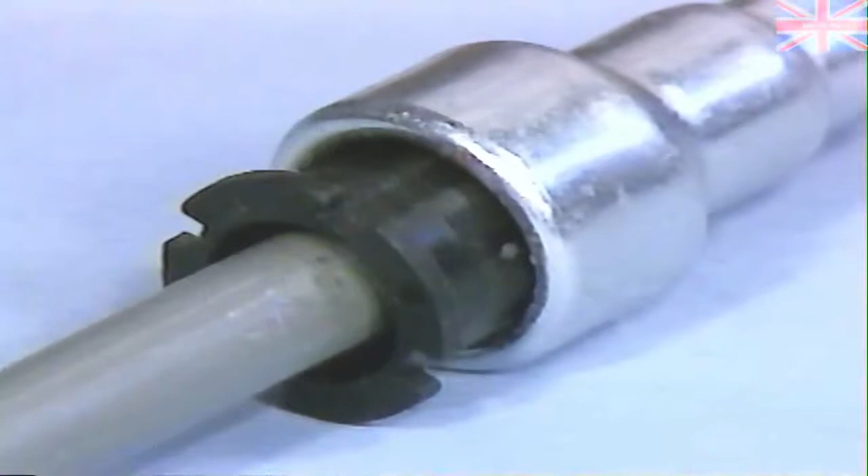The first style of quick connect fitting we'll cover is the release ring type, as seen here. This type of fitting can be identified by a full round plastic release ring. Two types of release rings are being used: one type with a shoulder as shown here, and a second type without a shoulder.

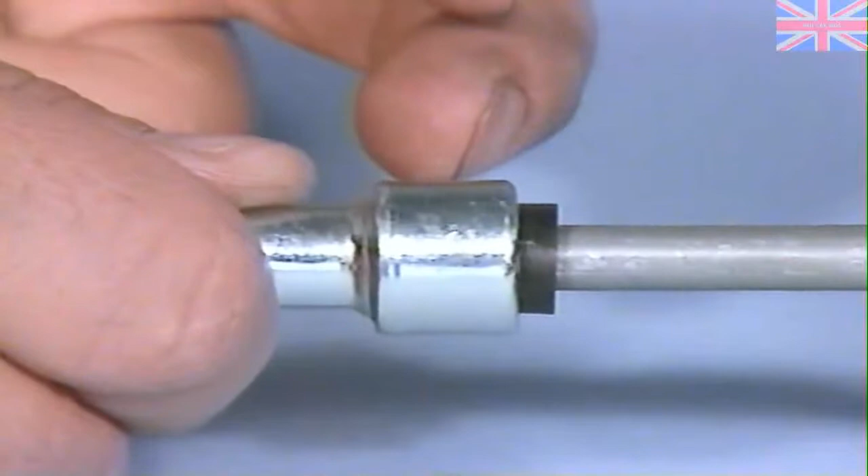Some release ring type fittings can be removed by hand without the use of tools. To disconnect this type of fitting, firmly push the fitting toward the component being serviced while pushing the plastic release ring squarely into the fitting. With the plastic ring depressed, pull the fitting from the component. Be aware, if the release ring is cocked during removal, it may be difficult to disconnect the fitting.

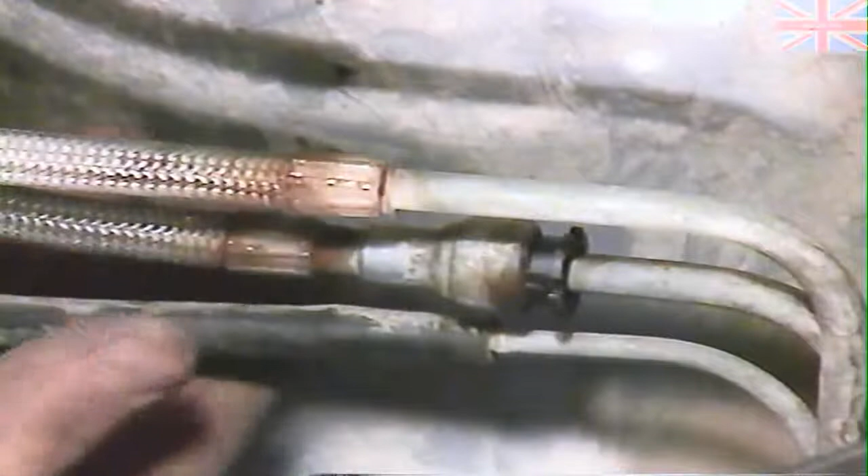In the event the fitting is tight, an open-end wrench can be used to aid in disconnecting the fitting, as shown in this second example on the vehicle.

Before connecting a release ring fitting, clean and lightly lubricate the fitting ends with clean 30-weight engine oil. Ensure that the release ring moves freely and is not in the release position. If the release ring is frozen in the release position, replace the fitting and tube assembly.

Next, insert the quick connect fitting into the end of the component being serviced until it clicks in place. Do not rely on an audible click to confirm that a secure connection has been made. Verify a locked condition by firmly pulling on the fuel tube and fitting several times.

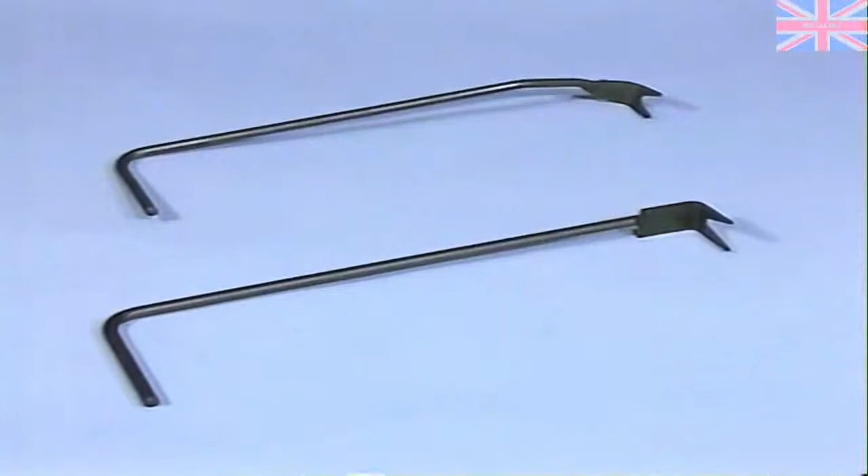As an aid to disconnecting both types of release ring fittings, special tools have been developed. These tools can aid in disconnecting, connecting, and verifying the connection of release ring fittings, especially in tight spots like the fuel rail connections on trucks and LH model passenger cars.

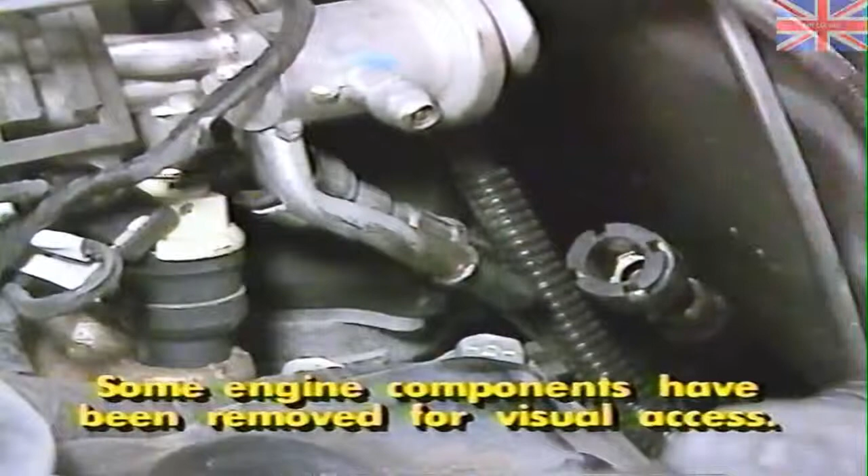To use the special tool, firmly push the fitting toward the component being serviced and position the V-groove of the tool on the top of the release ring and depress the ring with the tool. With the ring squarely depressed, pull the fitting from the component.

The tool can also be used as an aid to connect the release ring fitting. To do this, start the fitting on the nipple by hand. Then place the V-groove of the tool below the largest diameter of the Quick Connect fitting and pull the tool toward the fuel tube nipple until the fitting clicks into place.

To check the connection, place the V-groove of the tool between the release ring shoulder and the top of the Quick Connect casing and push on the tool a few times to ensure a good connection has been made. A straight variation of the tool is also available for use on fuel rail connections on passenger cars.

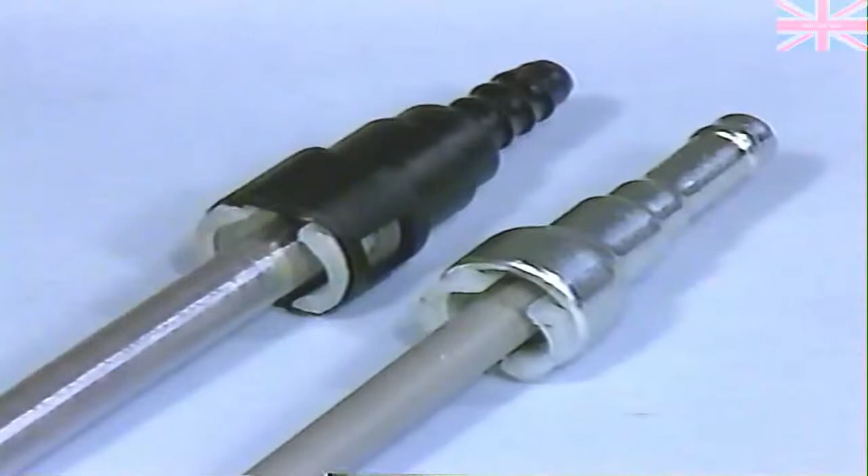The second type of fitting you might encounter is the 2-tab Quick Connect fitting, as shown in these examples. To disconnect this type of fitting, squeeze the plastic retainer tabs against the sides of the fitting with your fingers. Do not use tools on this type of fitting. They may damage the fitting.

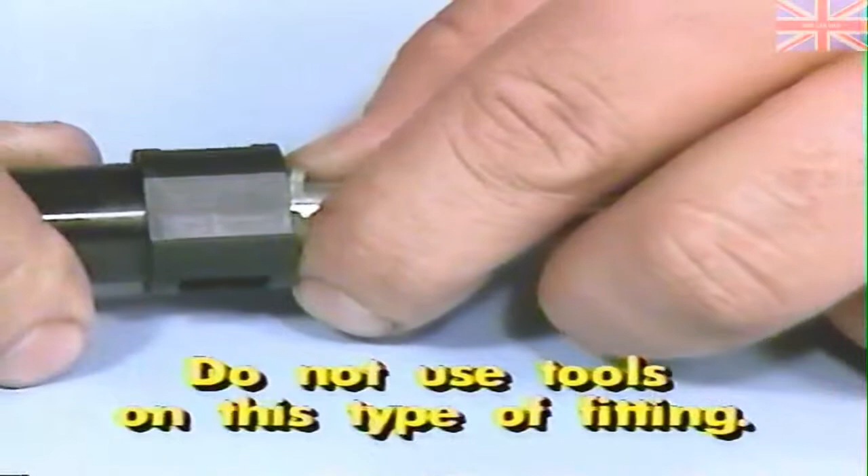After depressing the tabs, pull the fitting from the fuel system component being serviced. As seen here, the 2-tab retainer will remain on the component after the fitting is disconnected. The O-rings and spacer will remain in the Quick Connect fitting connector body. Again, inspect the Quick Connect fitting for signs of damage.

If the 2-tab retainer must be removed, carefully spread the tabs with a small screwdriver and remove the retainer from the component. After removing the retainer, inspect it for any cracks or signs of damage.

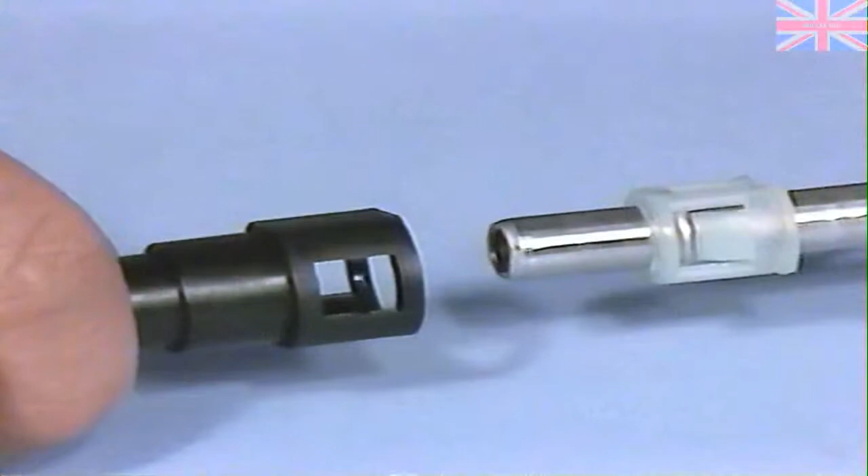Again, before connecting the fitting, clean and lubricate the parts. Then insert the Quick Connect fitting into the component being serviced until the plastic retainer clicks into place. Again, do not rely on an audible click to confirm that a secure connection has been made. Verify a locked condition by firmly pulling on the fuel tube and fitting several times.

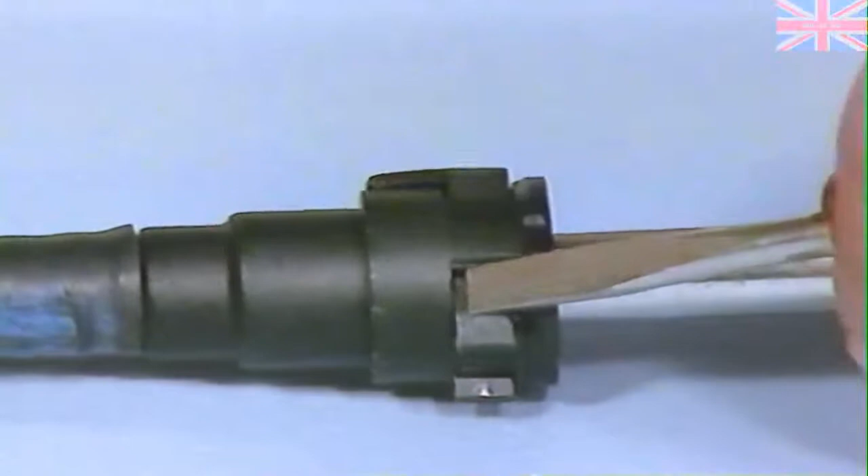Finally, for the single pull tab style of fitting, press the release tab on the side of the fitting to release it. While pressing the release tab, use a screwdriver to pry up the pull tab. After removing the pull tab, the Quick Connect fitting can be removed from the fuel system component being serviced.

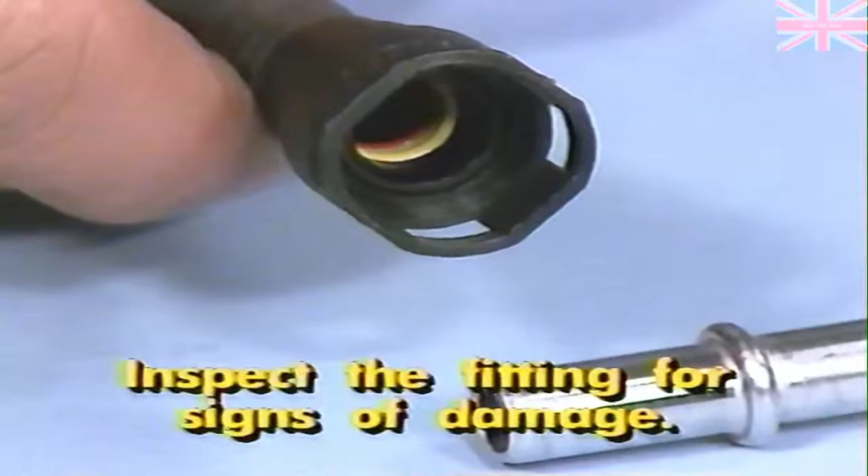Inspect the Quick Connect fitting body and fuel system component for signs of damage. If damage is present, replace the fitting and fuel tube.

To connect a pull tab fitting, first clean the parts and lubricate them with clean engine oil. Next, insert the Quick Connect fitting into the fuel tube or fuel system component until the built-on shoulder of the fuel tube or component rests against the back of the fitting.

Now, obtain a new pull tab and install the tab until it locks in place. Next, firmly pull on the fuel tube and fitting to verify a fully locked condition.

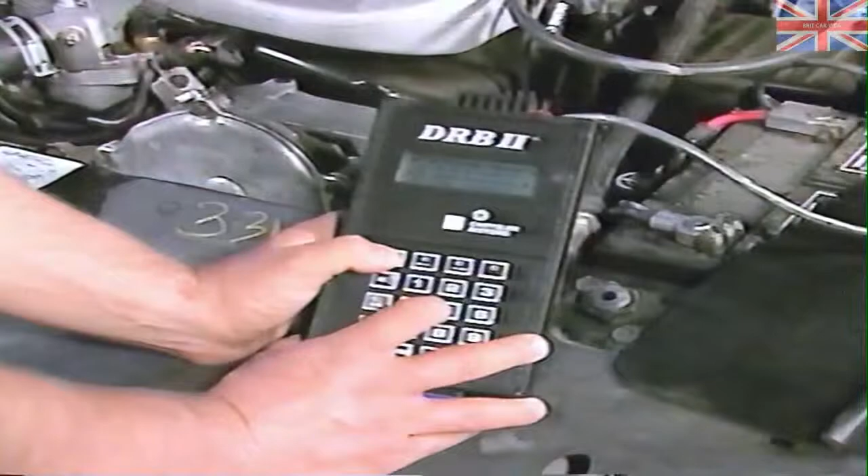After completing service on the fuel system, follow the appropriate service or diagnostic manual procedures to pressurize the fuel system. After pressurizing the fuel system, thoroughly inspect all connections and fittings for any signs of leaks.

This completes our overview of fuel system tubes, hoses, clamps, and Quick Connect fittings. Remember that this program was designed to familiarize you with the various types of fuel system components you might encounter on Chrysler gasoline-powered vehicles. For specific fuel system service applications, always refer to the applicable service manuals and parts catalogs for the vehicle being serviced.